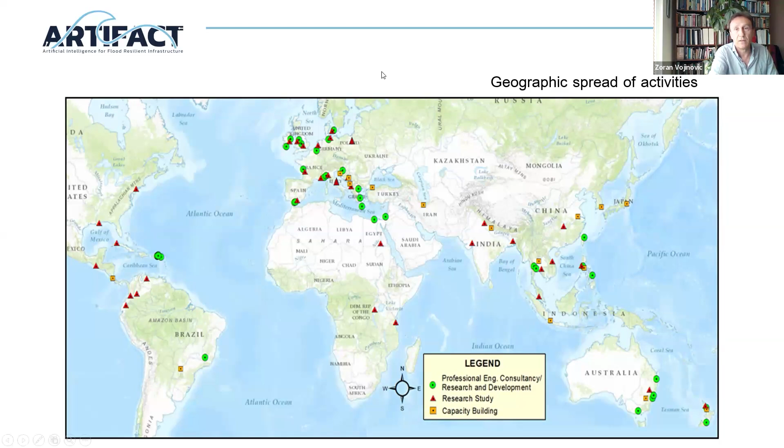I've pretty much worked around the globe, not so much in Africa, but in many other parts. In some of the case studies I'm going to show today, I will refer to some of these practical experiences that I've gained by working in different locations.

A couple of projects worth mentioning: notable research projects I've been working on and leading. There is a project called RECONECT, still active, we are in the phase of closing it now. It's on the topic of nature-based solutions, where we demonstrated in 9 different locations different kinds of nature-based solutions for flood protection. And before that, there was another very interesting project called Pearl, which also looked into ecosystem-based approaches in addition to modeling.

The learning objectives of this first lecture are to provide you with basic knowledge concerning urban flood simulation using physically based models, as Zoran mentioned. I'll try to cover some basic key concepts, and we will show you some practical applications. We hope that by the end of today you might be able to be more effective in applying new knowledge and supporting tools for flood risk management. So I will first start with some background information, setting the scene.

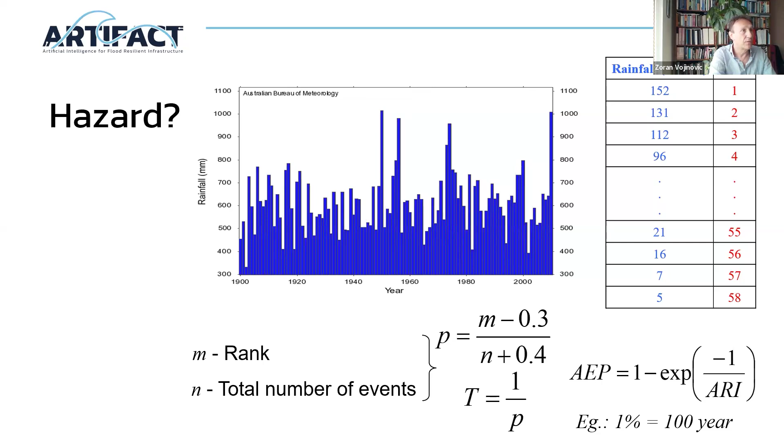Very briefly on the concept of vulnerability - there are more than 25 definitions that you can find in different literature, and again the disaster risk community has defined those. It can be referred to as the inability to avoid potential harm. So it is difficult to measure vulnerability, and often the overall dimension of vulnerability can be divided into different sub-dimensions.

For example, if you take an urban area, you can break it down into different aspects. You can look into the physical objects, the assets, the tangible aspects. You can look into the environmental or nature aspects, such as parks, maybe green areas, and so on. Then we can look into the social component, which matters because we need to know, in order to assess vulnerability in a particular area, who lives there, what is the age perhaps - is it a rest home, is it a school, is it an area which hosts a number of schools, and so on. So we need to look into the social aspects.

Economic - typically the dimension of vulnerability refers to the economic sector: how quick, how resilient, or how vulnerable is the economy of a particular urban area, and how quickly it can bounce back following a disaster. We can also come up with more dimensions, such as institutional - we can look at how different institutions, like emergency services or the health sector or other services, react in case of a disaster.

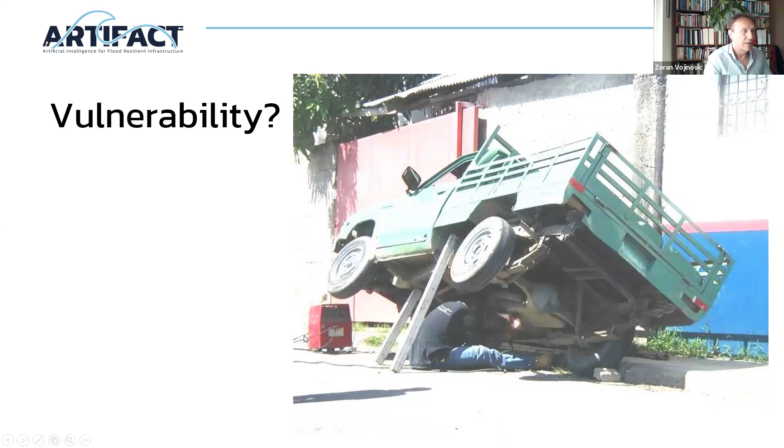This is what I like to show my students: if you have a guy working under a truck like this, obviously he's vulnerable. This is a very simplified illustration of vulnerability. Maybe here you can find some people who are more vulnerable, some who are less vulnerable. If people do things that put them in danger and they're not protected, they are vulnerable.

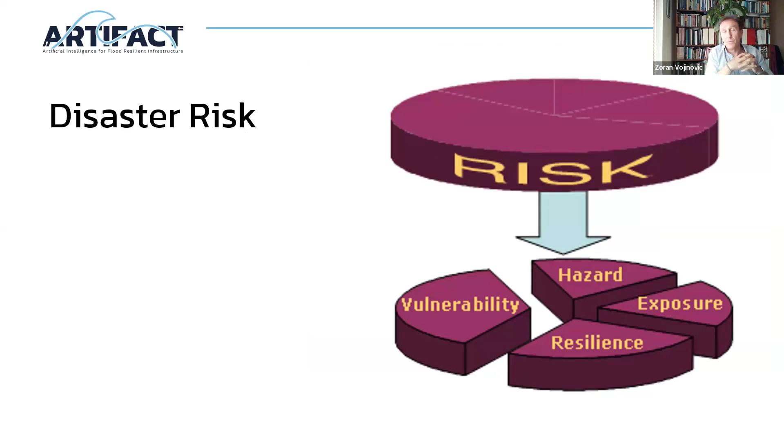So we can go on like this, but the bottom line is that risk can be decomposed into different components in order to assess it for a particular area, and to come up with flood protection measures which will minimize the risk.

We talked about this part. Now, an important distinction is how we estimate hazards, which is through the use of numerical models, and this is what we are going to talk about today. Vulnerabilities, coping capacities, and resilience are typically assessed through surveys, interviews, or other assessments, but not necessarily the use of models. Models, particularly computational models, are used for the assessment of hazards.

Before we move on with modeling, it's important to distinguish different types of floods, because different types have different physics and propagation properties, and you may need to consider certain aspects depending on whether you have pluvial, urban, or fluvial flooding. Flash floods are typically the fastest occurring, coming from steep slopes and hills. There can also be coastal floods, groundwater floods, or a combination of two or more types.

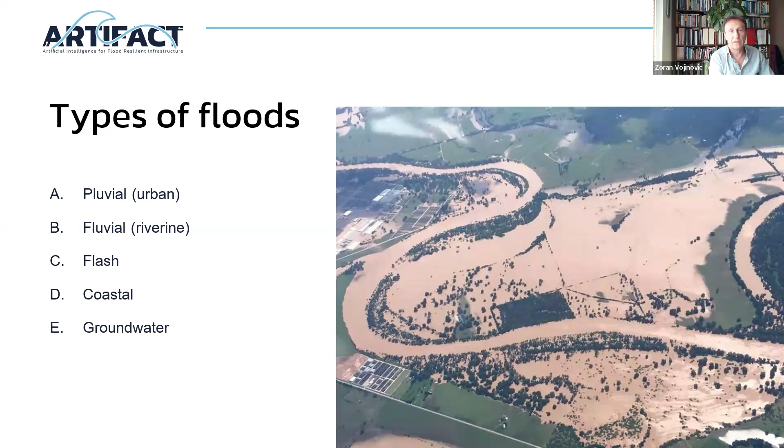If you have a picture like this, with a river and a large flooded area, the question is which type of flood this is. We're not in a lecture room, so I won't waste time asking for comments, but I'm pretty sure you can conclude this is a fluvial or riverine flood because it occurs along the banks of the river.

If we have steep slopes and hills which generate fast runoff that comes down into low-lying valley areas, that is typically referred to as flash floods. The difference between flash floods and fluvial floods is that the velocity, or the physics of the flood, can be considerably different. With flash floods the velocity can be 3, 4, 5, 6, 7 meters per second, whereas with riverine floods, the propagation and velocity is much slower.

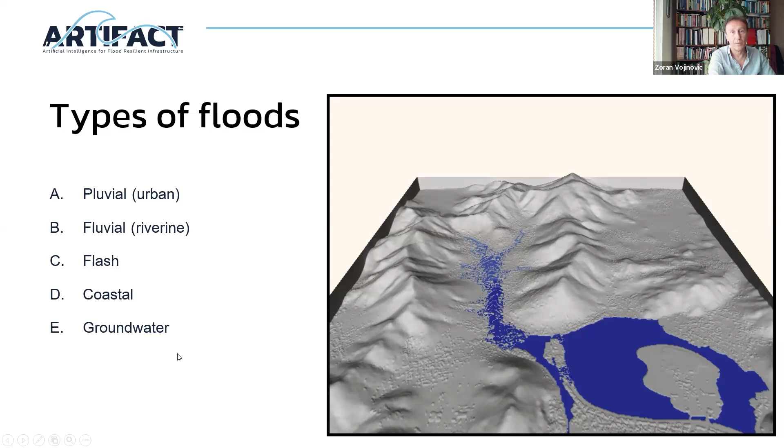So talking about flood hazards—again, models are used for flood hazards—typically we distinguish four variables that can characterize a flood hazard.

Models compute typically the water levels, velocities, and duration of a flood, and if you turn on the advection dispersion component, you can model the water quality processes and the concentration of pollutants and the sediment transport and things like that. So depending on the physics of the different flood type, you will choose different variables, which will be computed by your numerical model to express flood hazards.

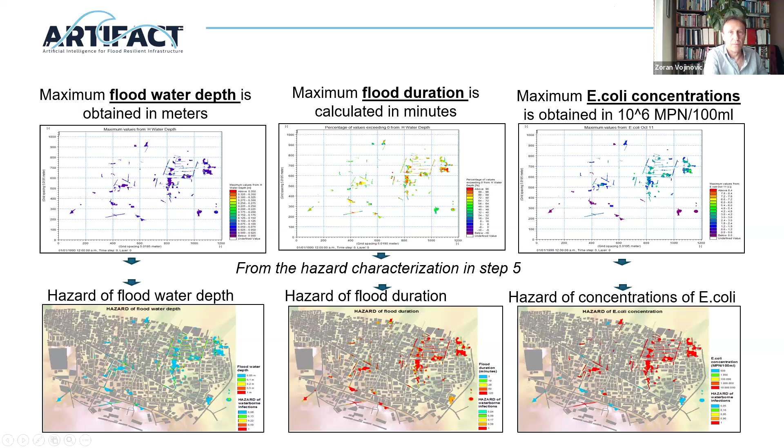So what happens at the end? You have whatever depths, velocities, durations, concentrations, flood hazard - you compile them all, overlay them, and then you get a map in GIS. So this is about the hazards, and this is why we need to use numerical models.

A very quick example of a case just to illustrate this concept - I'll move now from Thailand to the Caribbean. This is the island of Saint Martin, which is under the administration of France and the Netherlands. This is how the island looks on a nice day, and this is the administration border between France and the Netherlands, for the two territories.

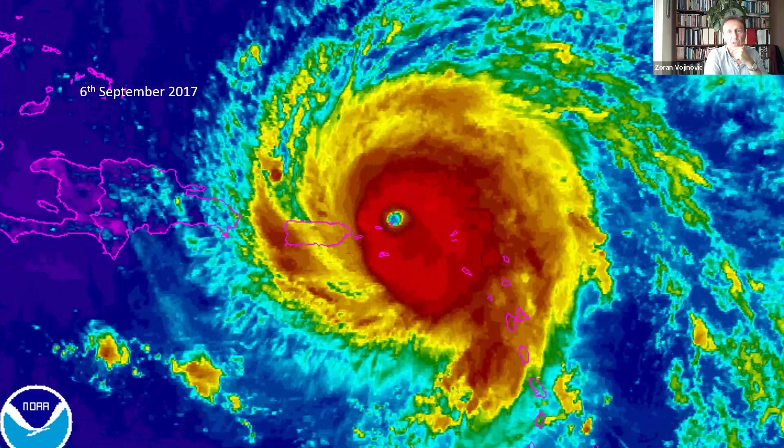This island suffers from tropical storms. In 2017, there was a big hurricane whose eye passed through and was assessed to be the biggest ever recorded - Hurricane Irma. The eye of the hurricane went through the island of Saint Martin and brought devastating damage, with wind speeds of around 300 kilometers an hour, but also a lot of heavy rainfall.

This is just an example to show how numerical models can be used for assessment of such events. We've modeled the actual pressure and wind fields and the storm surge, and this is how the hurricane propagated. We've also modeled the impacts on land, looking at how the resulting rainfall causes floods. In this case, we've used a combination of one-dimensional and two-dimensional models, which I'll explain in a bit.

As an interesting sidetrack, we've also used similar two-dimensional models to compute tsunami effects for the same island, because there are tectonic plates just north of Saint Martin known to cause earthquakes and tremors. You can also use numerical models to assess the effects of tsunamis.

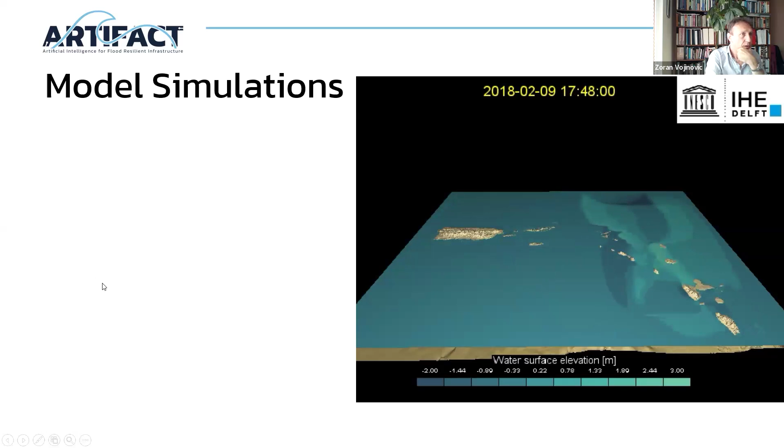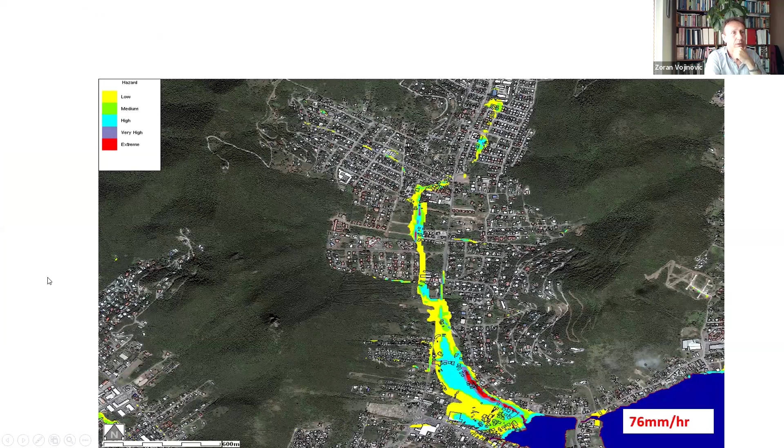If you combine the two using those ranges, you can present hazards for different events - for example, a 1-in-2-year, 5-year, 10-year, 20-year, 50-year, or 100-year event, and then extreme events. You can overlay that information with vulnerability data - we did on-the-ground assessments of critical buildings - and come up with a flood risk map.

So this is the introduction, just to set the scene and explain the importance of numerical modeling for flood risk assessment, because it really drives the estimation of hazards.

When we talk about urban drainage simulation, we're really talking about modeling minor and major systems. The minor system is the pipe network below the ground; the major system consists of the overland flow paths. You may have interaction between the minor and major system, or primary and secondary - in Australia they call it minor/major, in the UK maybe primary/secondary, and in the literature some refer to the same dimensions as below ground and above ground.

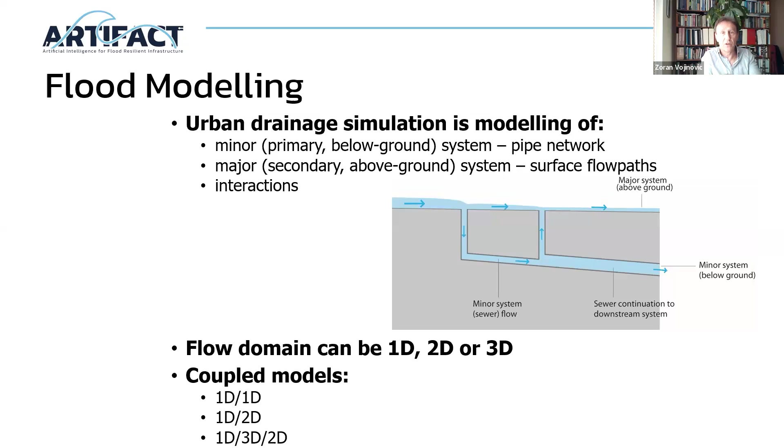The interaction may happen through manholes, connecting points, or gully pots. The flow domain can be one-dimensional, two-dimensional, or three-dimensional. Depending on what we're studying, we can couple these models: typically a 1D model for the minor system pipe network, and 1D again for overland flow paths - that's the 1D-1D coupled approach. Alternatively, you may couple 1D with a 2D model for modeling overland flows along surfaces. If you need to look into vertical distribution, such as how flows go into weirs or particular structures, you may introduce a three-dimensional model.

The types of models that can be used - we distinguish between stochastic and deterministic. Stochastic models obviously have some random character or random features, and in hydrology there's a lot of randomness.

In the literature, you'll see people talk about hydrologic or hydraulic models. Sometimes you may see a distinguished representation through lumped or distributed models. In terms of the type of model, what we also at some point called data-driven models is perhaps what has been referred to as artificial intelligence, but we may also have rule-based models, like using fuzzy models, where we set up the rules. We can also have physically based models, and a combination of these different models, which we refer to as hybrid.

The models can also be conceptual or process-based, can be simplified in terms of the dynamic equation or momentum equation, where I will come back in a moment into different components of that equation. So we can simplify it using the kinematic wave, or we can use the full dynamic wave.

The models also, you can find in the literature, people talk about low resolution as opposed to high resolution. Low resolution means that the computational points are few compared to high resolution, where you have numerous, many more computational points. We can also have a model which replicates flows through a sewer system, surface flow, or coupled models.

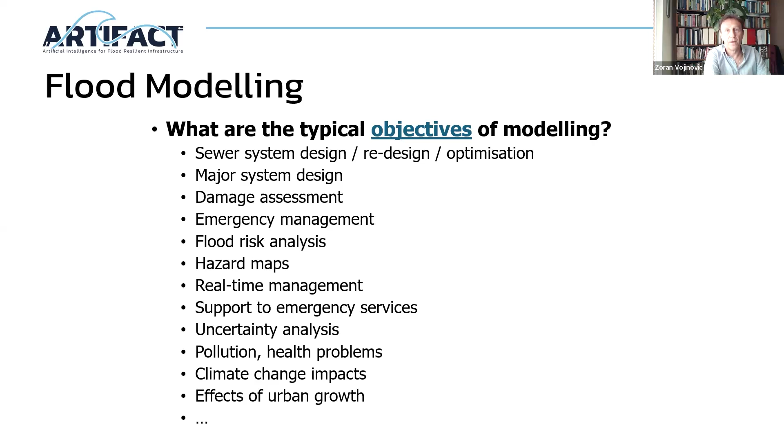So why do we bother with modeling? The models are typically used if you want to design a new system, redesign it, or optimize rehabilitation measures. If you want to assess damages for emergency management, flood risk analysis, models are fundamental for assessment of hazards, real-time management, real-time control management (RTC), support to emergency services, uncertainty, pollution, climate change impacts, effects of urban growth, and so on. For all of these questions, we would need support from numerical models.

So what data is needed to set up a model? Of course, you need rainfall data. For two-dimensional models, we need digital terrain models, or contour lines, or digital elevation or digital surface models. We need information about land use. We need information about the drainage system, which we normally use to set up the one-dimensional model. This can be either detailed, containing every single pipe, but that's very rarely done. Usually, every model of a pipe network system is simplified to a certain degree, so we omit certain pipes and manholes and focus only on the main trunk sewer lines.

We also need observed flood events. Why do we need observed flood events? We need them in order to calibrate the models. Why is calibration needed? It's in order to adjust model parameters so that the model can be brought to predict results that are closer to reality rather than just some arbitrary results.

We may also need some socioeconomic data for damages, insurances, traffic, and so on. The mode of simulation with the models can be either online—you're running the model right now, maybe receiving information from numerical weather prediction models about upcoming storms, and then simulating to predict water levels in your system, which you may use to open sluices or gates to regulate the system, or engage emergency services for evacuation. Or you may have offline simulation, which is not real-time, but running simulations for scenario analysis for the future.

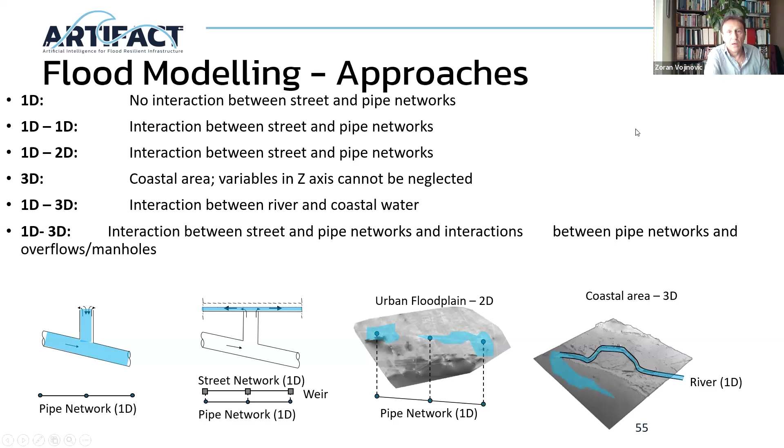So the take-home message is that there is no perfectly accurate model. Modeling work is never accurate - and I put that in apostrophes. That's because models are really a representation or approximation of reality, and it all depends on the assumptions, the complexity and resolution of the model, whether the results will have reduced uncertainty or large uncertainty.

In terms of calibration, it's a very important process because that drives the adjustment of model parameters. If the model parameters are not adjusted and default values are used, it may be appropriate for some areas but maybe not for others.

Most of the time it is not appropriate, and then you may get either over prediction or under prediction. So if you're using your model for design purposes and it's over predicting, you will over design your layout, which may lead to unnecessary expenditures. So to minimize these issues, you need to pay careful attention to calibration.

Calibration is a process which requires real world measurements, which I'll be talking about in the second hour. Those measurements are used to compare with the model results, and then through a trial and error process we adjust certain parameters. There are parameters on the hydrological side of the model and also on the hydraulic side that we need to adjust. Then we try to merge the two curves together, the modeled and the observed or measured.

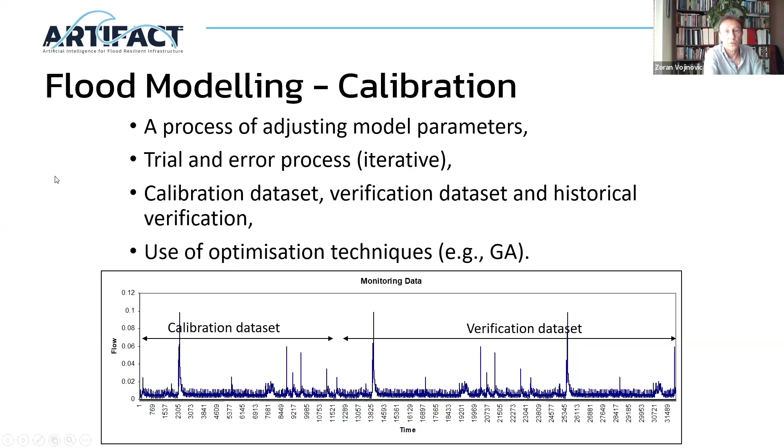So now the question is, how do you know when to stop, when these differences are acceptable or not? What we need to do is use some statistical error functions.

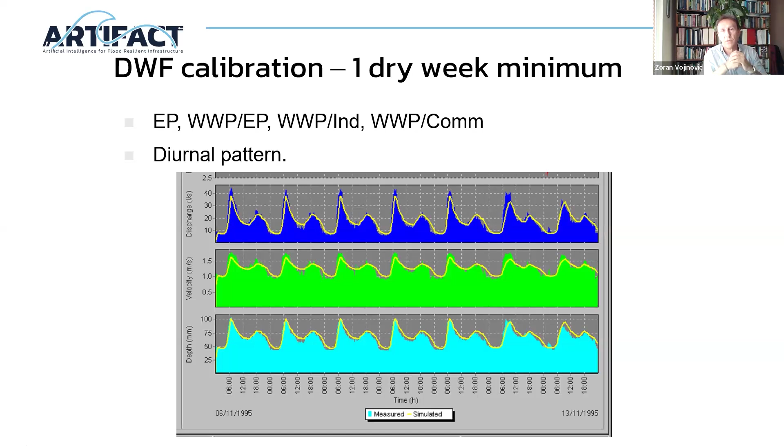I mentioned before that in Thailand you have a combined system where one pipe carries two flow components, the wastewater and the stormwater. The sequence of attempting calibration goes first through the dry weather flow calibration, which is related to flows coming from wastewater points, sewage and so on. Then we would attempt the wet weather flow calibration, which refers to the particular response of the system to a rainfall event. So first we do dry weather, then wet weather, for a combined system.

And then we need to be very careful when we look into the errors, when we study the error of our model as we calibrate it - we may track the temporal, seasonal biases or magnitude biases.

Temporal and seasonal biases are the biases that occur throughout a particular period of time or particular season. Maybe a model is constantly over-predicting or under-predicting during the wet season where the groundwater aquifer comes in, and maybe we are not incorporating the hydrological model of the below ground surface to a great level of detail. So we need to be careful to track for this type of bias.

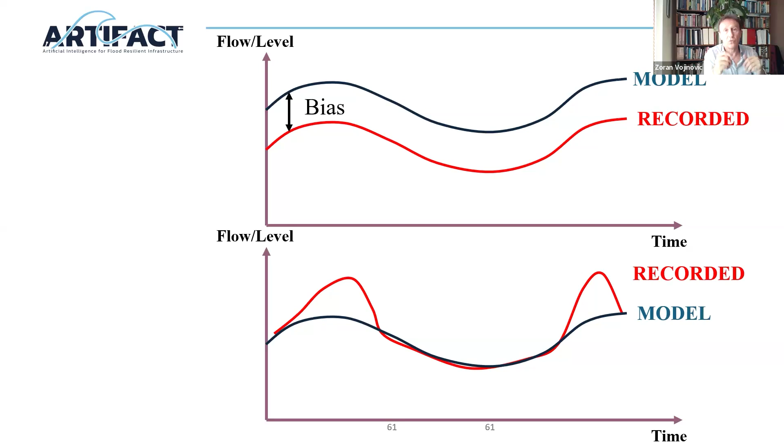Sometimes the bias can be a magnitude bias related to either low flows or high flows. Maybe your model will be predicting very well on small events, but not very well on large events, for which you need to perform some additional rounds of calibration. You may also plot residual plots between your errors to detect these biases.

You can use different statistical formulas to look into the error of your model, or the accuracy of the model, and there are different functions you can use. I happened to be studying that as part of my PhD some time ago, where I looked into different distributions of noise and different range magnitudes. There can be different functions used: root mean square error, coefficient of determination, coefficient of efficiency, Pearson's coefficient, and so on. I found one particular function which was least dependent on, or least influenced by, different conditions, but you can use standard statistical formulas.

In terms of the calibration procedure, on the hydrological side of the model, we would first adjust the mass balance, looking into things such as the runoff coefficient and the percentage of impervious versus percentage of pervious area. Then we would go through the adjustment of the timing of the peaks. So that's for the hydrological part.

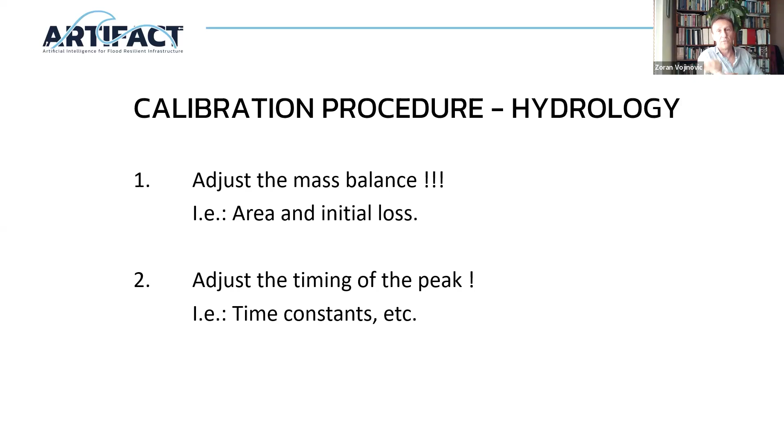With hydrodynamic models, we have two components: one is the hydrology, which is the rainfall runoff, and the other is the flow through either pipes, open channels, or overland surfaces. For the pipe flow models, which is very much the hydraulics, we can have different approximations, and in hydrodynamic software we typically use the shallow water equations, which are the Saint-Venant equations.

What you see here is the one-dimensional expression of the Saint-Venant equations, where the top equation is the conservation of mass, or continuity equation, and the second equation is the momentum, or dynamic, equation.

That equation has a number of different terms, which, when you run some of this software, particularly commercial software, they'll give you an option on. The first term on the left side is the local acceleration term, then you have the convective acceleration, then the pressure term, then the friction and slope effects. Depending on the approximation you want to use, you can eliminate certain terms, and you can run your model as a kinematic wave, diffusive wave, or dynamic wave.

A key take-home message is that if you are dealing with floods, you should be better off working with the dynamic wave and not the kinematic wave. Although the kinematic wave is computationally much faster, it really comes down to the Manning's equation, which is not influenced by dynamic conditions such as backwater effects and flood issues.

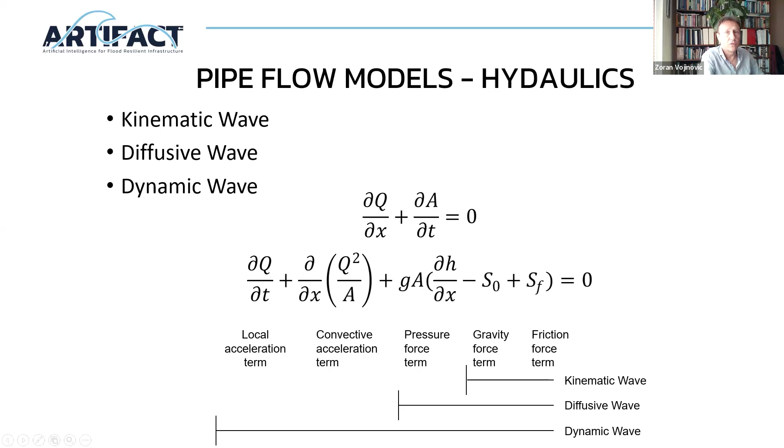Another good reference, besides the two books I mentioned that address all these things, is an article published some time ago in Urban Water Journal, which goes through all these assumptions of the different equations and also talks about how these equations are solved. You can also find this in the two books, or any other book, that talks about hydrodynamic models.

These equations are basically hyperbolic partial differential equations, and they cannot be solved analytically. For them, you need to discretize the domain in terms of time and space. Then through the discretization, you can use different solving methods, such as finite elements, finite difference, and so on, and these equations are solved numerically through iterative processes.

So for the pipe flow, the calibration procedure involves looking into the Manning's number at nodes in terms of head losses, and also in terms of the weirs.

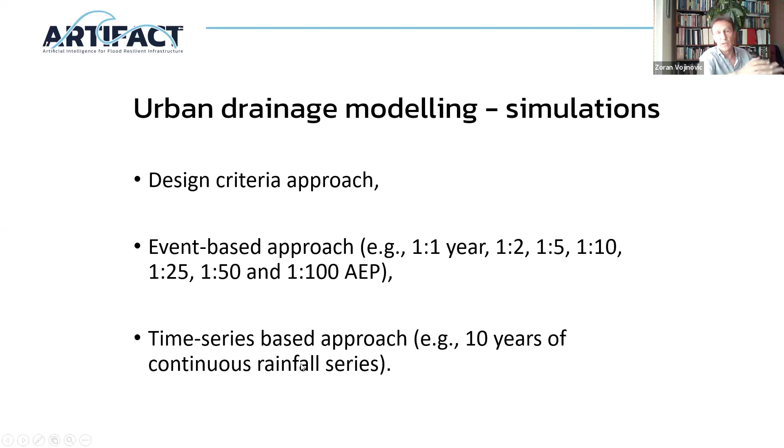Simulations can be either a design criteria approach, event-based simulations, or time series, where you take the whole series of rainfall data and simulate.

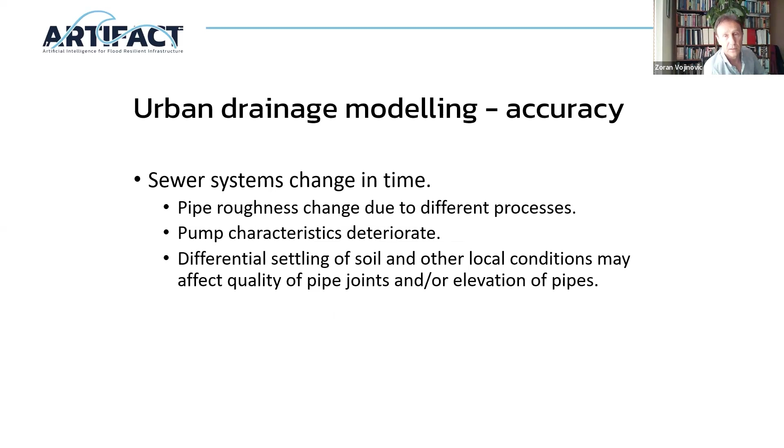Also important: sewer systems change over time, and pipe roughness changes. If you have a pipe constructed 50 years ago with a certain material and certain roughness value, you'll probably need to run a CCTV camera or something like that to look at the condition of the pipe and try to express that in terms of roughness.

I will skip this part. In terms of software, there's commercial software, typically DHI software, where the numerical engines were written by Professor Mike Abbott, the late professor at IHE Delft. I had the great privilege of working with him and co-publishing one book with him. All these DHI engines are powered by Mike Abbott's numerical developments.

On the other hand, we also have software from Deltares, another big lab for hydraulic modeling software. You can also find others like Bentley nowadays, a different company, and software through the US EPA, or HEC-RAS software for one-dimensional modeling of rivers, and so on.

I think I will need another 5-10 minutes into the next block of lectures just to finish off the modeling steps.

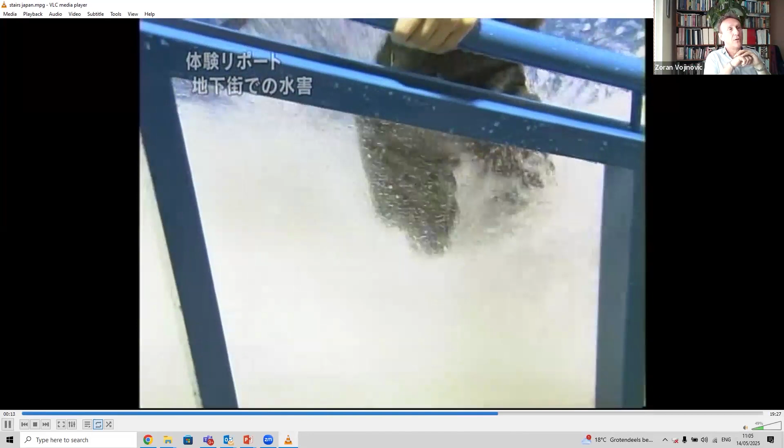I'll show an example of how our Japanese colleagues look into this. I hope you can see what I'm showing here. This is a test carried out quite often in Japan. When you talk about hazards, different velocities of water, different depths, and different circumstances will affect people's ability to walk through flooded areas.

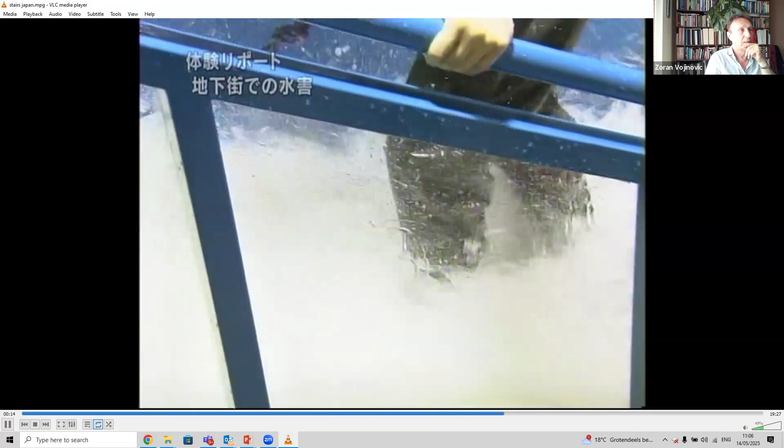This is an example from Japan, where in urban areas, particularly vulnerable spots used to be - not any longer, but used to be - the metro stations, where water would gush down through the stairs, and people who are trapped need to walk out. This gentleman is showing that it's not really easy to walk through that.

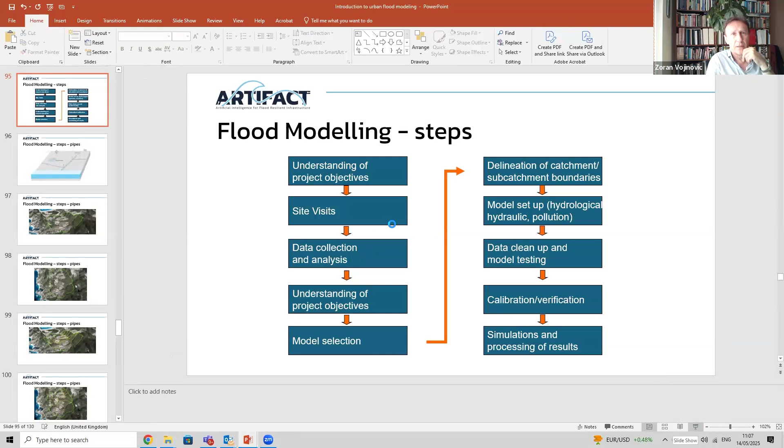Okay, now I will move to the part of flood modeling and what the steps are, how do we go about it. I have lectures for both open channel flow and pipes, but I'll just pick the pipe example. So what are the steps? Okay, we can see now - yeah, now it's fine. Go ahead, I think it takes a couple of seconds to come up.

So what are the typical steps if you are about to conduct a flood modeling study for a particular area? Obviously, you start by getting a thorough understanding of the project objectives, and sometimes the project objectives may influence selection of your model, your data resolution, or your data collection campaign and everything else. I think it's very important to be clear, particularly if you are working as a consultant for your clients, to understand what is driving the flood modeling study.

Then, of course, when you want to build a model - which is a numerical approximation of the real world - it is very important to perform site visits, to look into different parts of the catchment, look into different structures if there are any, maybe look into pumping stations, overflow structures, and so on. That helps a lot when you want to reproduce that in a digital world in the model.

Then, on the basis of the objectives and available data, you would plan maybe additional data collection. And when you perform that, you will analyze your data, because sometimes you may have further gaps or inconsistencies you need to clean up. That's why I like to put the question again - understanding of project objectives - and maybe on the basis of the data you have and the situation you inspected, you may need to refine your project objectives.

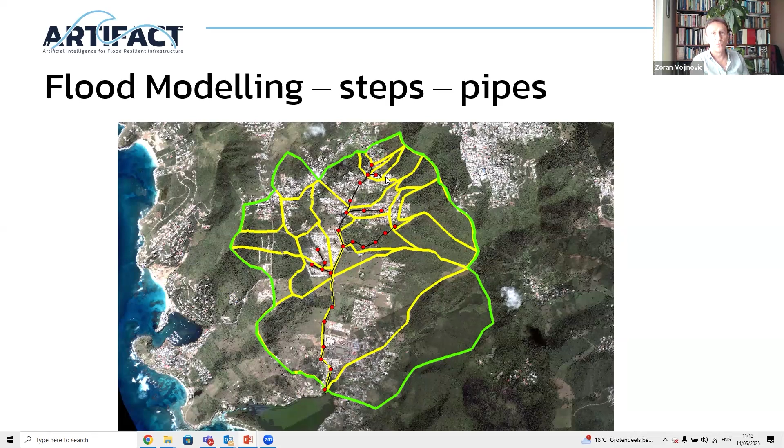So the next point is to give identification to each and every sub-catchment, and also each and every manhole or node in the system. Then for each and every sub-catchment, we have to calculate the various hydrological parameters depending on the hydrological model we are using.

Typical parameters are the percentage of imperviousness, slope, and type of soil, which will also drive processes such as infiltration and so on. Depending on the different hydrological model, you will collect different data for each and every catchment.

And then you will need to define the loading points. The loading point is the point in the network, or the node in the network, which will receive the flow coming from these sub-catchments.

When I mentioned the governing equations for the hydrodynamic models, which are the shallow water Saint Venant equations, we looked into the form of one-dimensional equations, with one continuity and one momentum equation. Obviously, if you have a 2-dimensional model, it will be 2 momentum equations and 1 continuity. These equations are hyperbolic partial differential equations, and they require boundary conditions.

In order to be solved, they are designed for subcritical flow conditions, not supercritical flow conditions. Sometimes conditions in the pipe flow system will change from supercritical, gushing down along a steep slope, and then going to a flat valley, where you have subcritical flow conditions.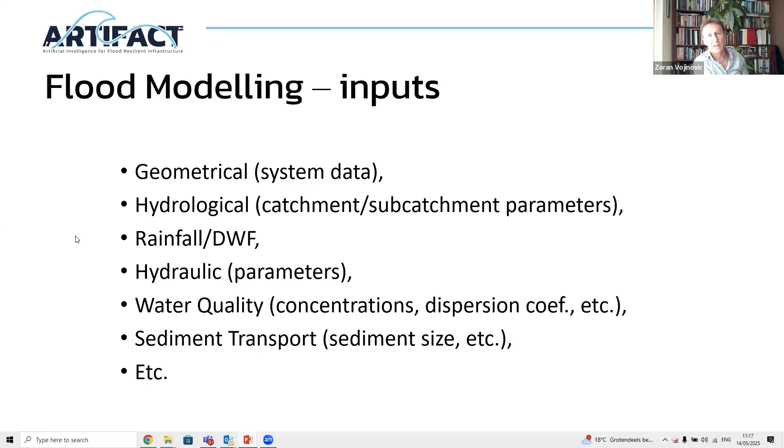In terms of the modeling inputs for a pipe network system, we need geometrical data, system data, manhole and pipe data. We need hydrological data, rainfall, hydraulic data. If we want to go into advection, dispersion, and water quality processes, we may need concentrations, advection and dispersion coefficients. If we are looking into sediment transport, we need to look into what type of cohesive sediments we have, what size, and so on.

When we set up this data, typical pipe flow data is comprised of the nodes or manholes and the pipes. For the nodes, the typical information we need is the X and Y coordinates, and the invert and ground levels - invert being the bottom, ground level being the top.

We need the diameter and standard diameter of the manholes for pipes less than 1 meter diameter. For larger pipes, maybe 1.5, 2 meters, you will need a chamber with special dimensions which also need to be taken into account when setting up a model. But for smaller, regular pipes, which are most common, you just put the information of 1 meter diameter for the manhole. And of course for the pipes, we need the diameter.

If we are setting up a two-dimensional model, we will need the airborne laser survey or contours to be interpolated in a GIS to create a raster representation of the surface topography. You may have a one-dimensional model for the pipe network and a two-dimensional model for surface flow, where we couple these two models, and there is an exchange in momentum, information, and water levels between the two model domains.

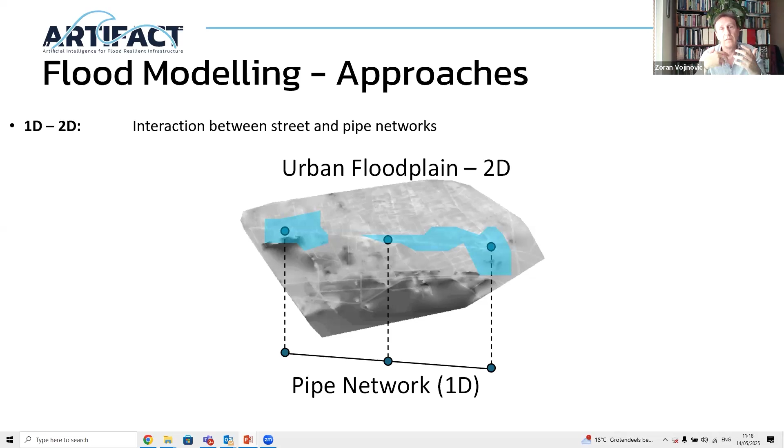The 1D model, when it gets surcharged, passes that information to the two-dimensional model, which computes through the cells how the water propagates, and then the water can also come back to the pipe network. So that dynamic interaction can occur, and it can be computed.

In terms of the two-dimensional model, a couple of words we should be aware of: the digital terrain model, digital surface model, or digital elevation model. We can have a representation of bare earth - no objects, no buildings, no roads, nothing - just the bare earth interpolation, which is on the left side, or you may embed the road network.

In some places around the world, people use the road network as a dual drainage system, where the curbs are quite high and used to convey water as an additional system. In that case, you may need to incorporate roads because the streets may act as open channels into your DTM - this is the representation in the middle. Or you go further and incorporate the heights of the buildings themselves, which is what we have on the right.

The flow directions on the left side, if it's a smooth bare earth DTM, the water can go anywhere depending on elevation, from the higher cell to the lower elevation cell. In the middle, where you have roads, the water will be confined to the roads until the curbs are overflowed.

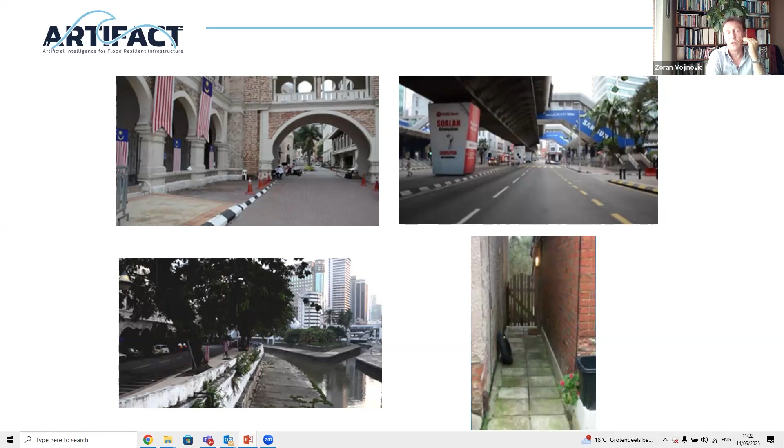And again, your flood map can be different. So what I'm trying to say here is not only that the model can bring in inaccuracies or uncertainties, but also the data drives that a lot. And the buildings can be represented in different ways. You can elevate the buildings, or you can induce roughness values.

I'm not going to go through this, or sometimes there are methods based on the energy loss footprint, or you can model buildings as porous elements. One of my colleagues, Vincent Guinot, a former colleague from IHE who now lives and works in France, has done a lot of research in terms of modeling buildings as porous elements.

And there are other methods. So I will conclude now with a couple more slides just to show you that we have to be very careful when we perform airborne laser survey. I had a PhD student who looked into all these commercial filtering algorithms, and obviously the person who does the flyovers and collects the airborne laser survey point cloud data will need to process this data through a particular filter.

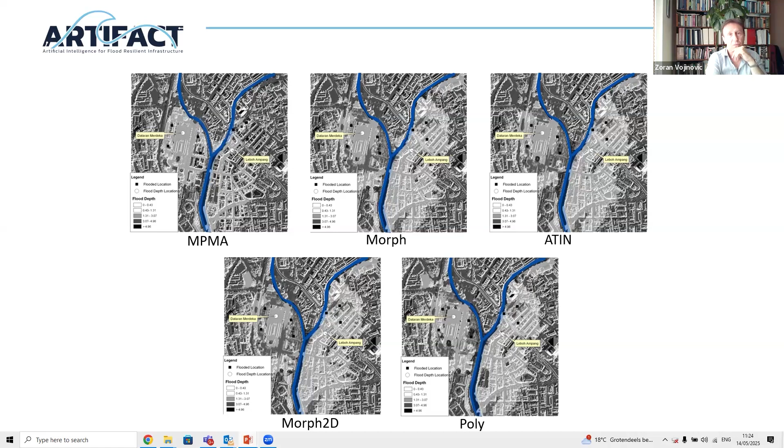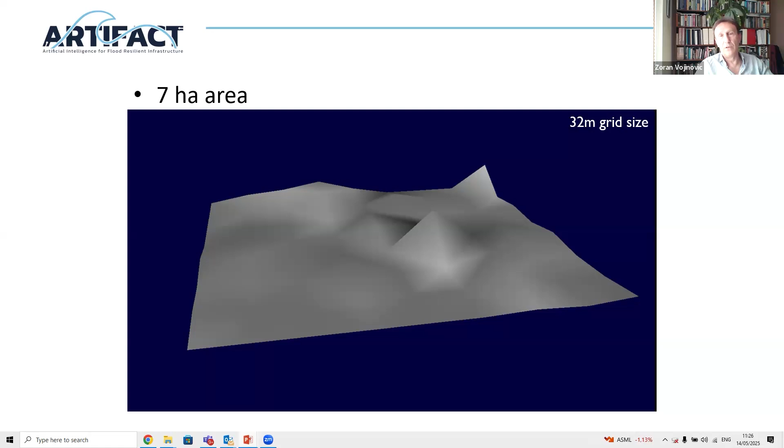It's something to be very careful about when you get your flood model results. At 64 meters and 128 meters, no feature is evident. So if you have 5, 10, or 15-meter resolution, depending on the topography, the 5-meter resolution may give you a reduced flood extent compared to 10 or 15 meters. And if you're using a 15-meter resolution model, and your critical infrastructure is shown to be flooded, in actual fact, if you use a high-resolution model, which we assume is more physically accurate, you may find that the critical infrastructure isn't flooded at all. So it's something to be aware of.

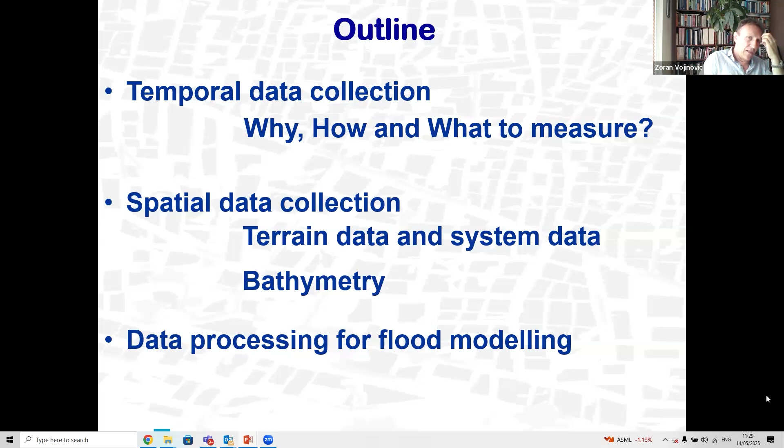This is what we're going to be covering now: data processing for flood modeling. Again, same references, I don't need this big introduction here. I will jump immediately into the instruments.

How do we measure flows? We can use different techniques and instruments: sensors and meters, structures constructed in pipes, and also some portable devices. What is usually measured is the depth or water level, velocity, and then the quantity is computed. Nowadays these types of surveys are getting quite affordable.

By the way, I have a cat here, so if you hear occasionally a little meow, that's my cat.

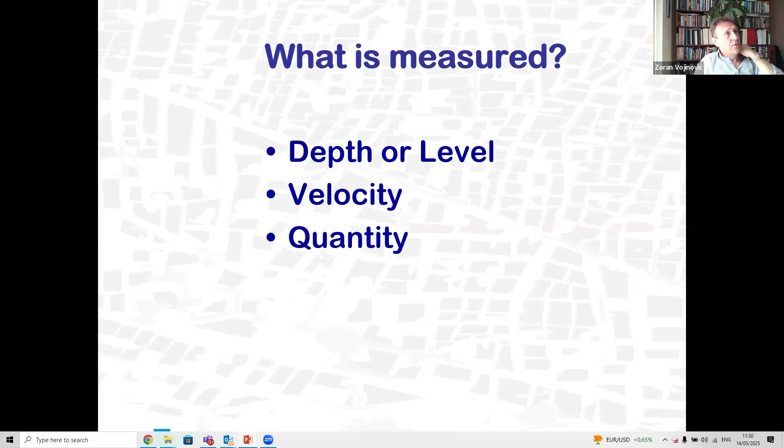The contractor who performs these kinds of surveys would process the depth and level data, velocity data, look into some noises, and try to express that into the form of a quantity, or Q, discharge. Sometimes we can opt to use a very simple technique, just using a ruler to measure depth. Sometimes you may opt to use pressure sensors, and sometimes an ultrasonic sensor. I'll go through the very basic aspects of this.

The ruler, or depth of flow stick meter, is really of limited use, because you cannot stand there with a ruler for hours recording depths. Obviously you can do a single reading, but it may not be accurate because you may have debris at the bottom of the domain you're measuring, which means you need to clean it properly to get more accurate readings.

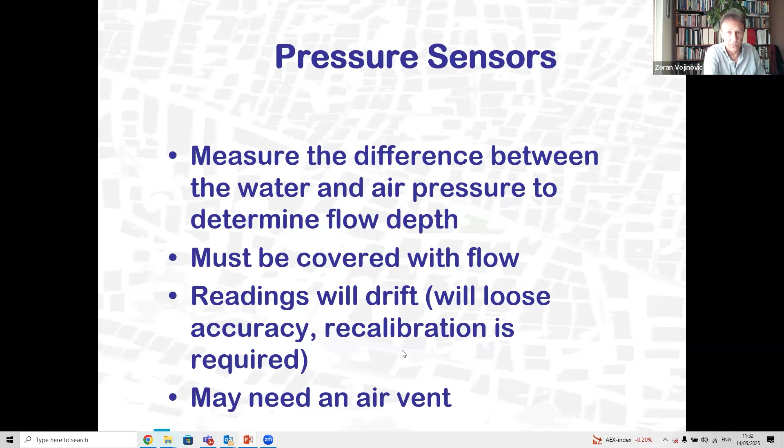Pressure sensors measure the difference between water and air pressure to determine flow depth, and they're very sensitive to the flow that covers the actual sensor. So they have more reliable readings when there's greater depth than when there's very low depth, going even below the sensor itself. Readings may drift and require recalibration. Pressure sensors are also sensitive to gas conditions in the system, because in sewer systems we often have gas of different composition, and we may need to perform some air ventilation of the system. This is an example of a pressure sensor for a flow meter.

Obviously all these instruments have advantages and disadvantages. As I mentioned, too low flow is hard to measure, and sometimes you may have a loss of power. The ultrasonic sensor, typically installed for pipe network systems, can be at the bottom or at the top of the pipes, at the soffit point. It measures depth, and if it's at the top, it measures the airspace above the flow.

It uses sound and a reflector. It has a transmitter which sends the sound signal, and a receiver which gets the signal back. It measures the time of return and recomputes that in terms of depth. Human hearing is between 20 hertz and 20 kilohertz, whereas the ultrasonic signal is 40 kilohertz, so it is beyond the range of human hearing.

I'm not sure if my cat will be able to hear it or not, but this is what happens for humans. Ultrasonic sensors can often be affected by noise, because it relates to sound. So if you have big construction works on the road, you need to be careful with your readings, installation, and signal direction, and this is how it gets installed.

If you have a pipe, you have your metal ring, you position your sensors, either pressure sensor or ultrasonic velocity sensors, and then there is a logger further up connected via cable. The logger can sit in your manhole, or you can take it out of the manhole to another chamber which is protected from vandalism, but usually it sits in the manhole.

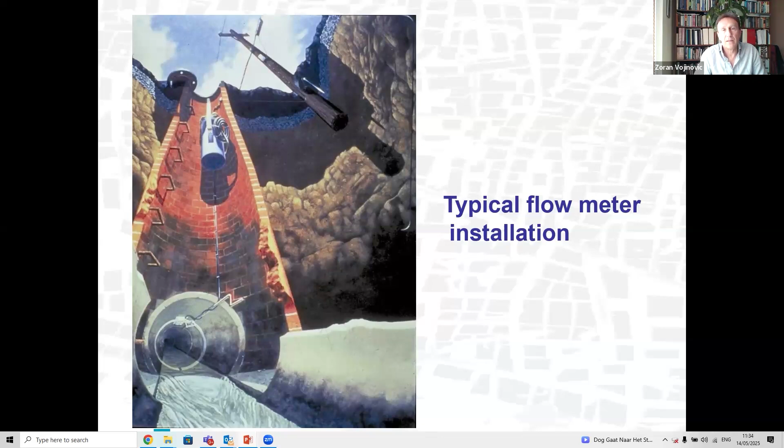And then the data from there can be transported. You can either go physically to the site and connect with your computer, or you can get it wirelessly transported through your telemetry and SCADA system to your office. So this is how it works. I mentioned that it has a transmitter and it detects the echo.

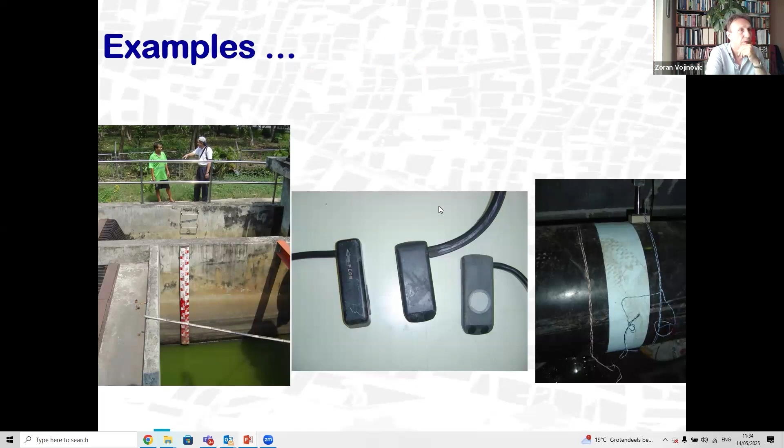On the left side here you see a picture of the ruler depth stick flow meter. This is an example, I took a photo of this in Bangkok, in one of the pumping stations there. The guy who operates the pumping station would record particularly the water levels at a certain period of time. These other things are different velocity and pressure sensors.

What you do is mount them on this kind of metal ring. You position them there, then depending on the diameter of your pipe, you insert it into the pipe, and there is a cable. Then, as I said, you can either come and physically download this, or you can receive it through the wireless system. There are different problems with ultrasonic sensors.

I'm not going to go into these details. All of these instruments have different advantages and disadvantages. You can also use electromagnetic meters and so on. This is the velocity sensor.

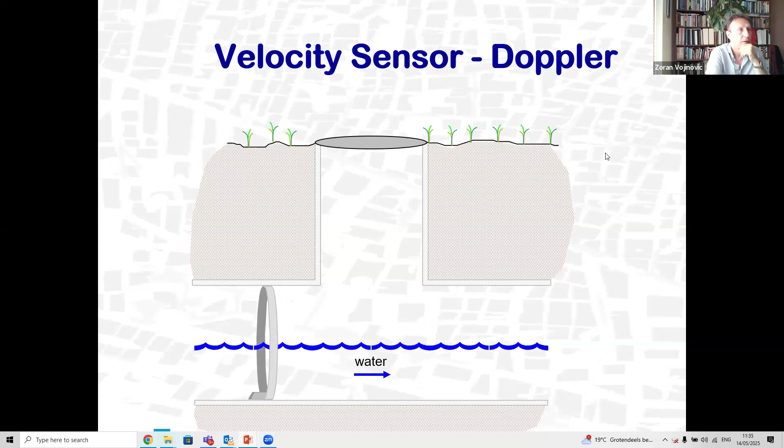If you have a flow cross-sectional view of a pipe network system with a manhole, then you have two crystals: one is transmitting the ultrasonic signal, and the other one is receiving it back.

So why is this important? It's very important to carry out these surveys, this kind of measurement, so that you can get the data in terms of the flows. But at the same time, we would like to always install a rain gauge in the vicinity of our flow gauge, so that the rain gauge can get the corresponding rainfall data.

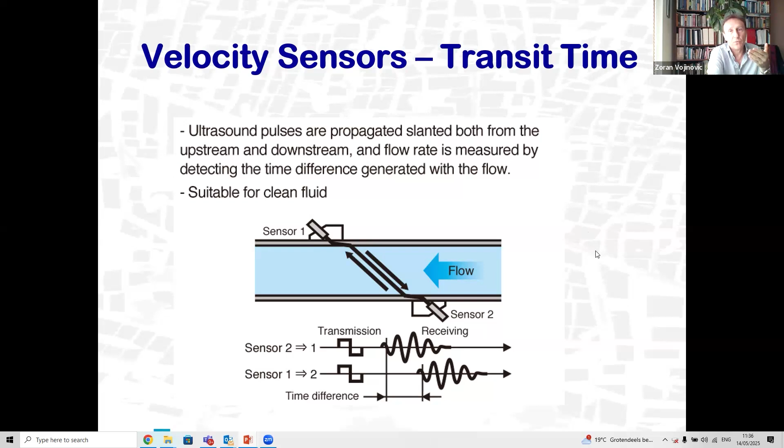Once you record this, you can open it up in Excel or whatever data processor you have, and look at how the rainfall looks in relation to the flow records. That can already help you a lot, but a further step is to use that for calibration purposes. I will move on because I have another 7-8 minutes to go.

Okay, this is very important: how to pick a location where you want to install your instruments. Different locations will make your instrument either more erroneous or more accurate. If you're picking a location close to a particular bend where the pipe turns, let's say 90 degrees, due to head losses, and if your gauge or sensor is installed very much in the vicinity of that bend, it may be affected by velocities shooting in all different directions. So you need to be aware of it.

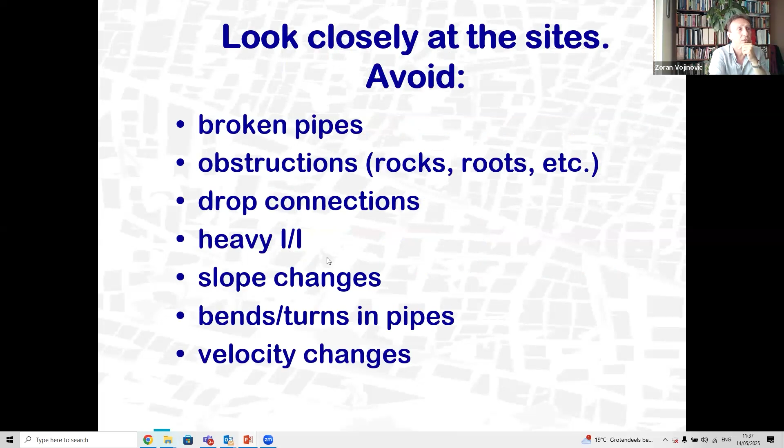Also, if your installation is where you have a steep slope leading to the transition between supercritical and subcritical flows, then again, due to head losses at that transition, you may get problems. And obviously you will try to avoid locations with structural integrity issues in pipes, like cracks. So broken pipes, obstructions, drop connections, heavy inflow infiltration, slope changes, bend turns, and velocity changes are all things to watch for.

Another important thing to mention here is that if you ever get to do this type of survey, you really need to be very careful how you approach confined space entry. There are always procedures for that because going into confined spaces such as sewer systems, you have hydrogen sulfide and other gases, sometimes methane, even explosive gas. So you need to test the situation, the concentration of gases in the system, and then ventilate if necessary, and wear appropriate wardrobe and equipment in order to do that.

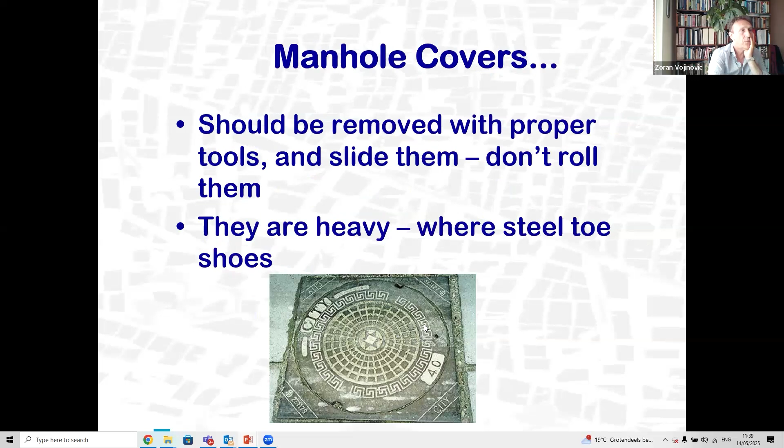I've known people when I worked and lived in New Zealand who were very experienced to manage this, very confident. They were entering the sewer systems on a daily basis for so many years. However, it is just the moment when the gas can overcome you, and then you can have a problem. I knew this chap, Ken Carew from New Zealand, who was a very capable guy, but he was not careful once, and that cost him his life. So obviously you may need some vaccinations, and you must be careful when you lift manhole covers because of the weight that they carry.

Now I will move into another thing. When you measure the rainfall, we typically use tipping bucket rain gauges, which is the bucket that when it gets filled, it tips and sends the signal. So you know how many tips there are, and you can relate that to the depth that fell.

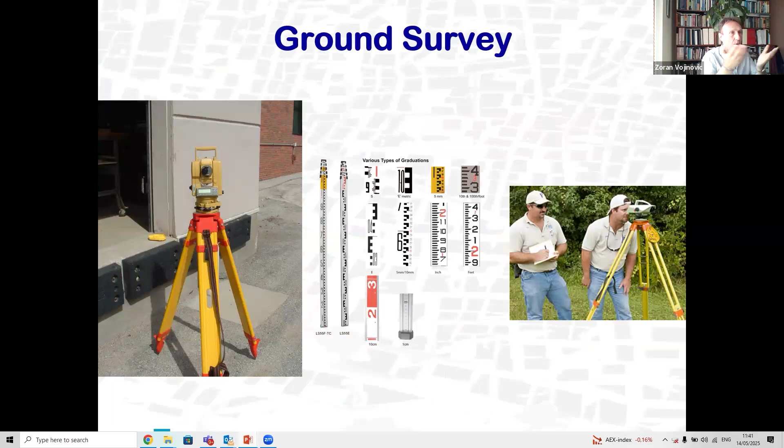Now, a few words on spatial data collection. Two-dimensional models require terrain data collection, which you can do either through ground surveys using a level meter, theodolite, or total station to measure this. Then you take the spot elevations and interpolate to create a continuous surface that you can later import into your two-dimensional model.

But nowadays, the technique called airborne laser survey is getting very convenient and affordable, which basically requires a low-flying aircraft with a GPS system that talks to satellites at the ground positioning station, an inertial measurement unit, and also a LiDAR scanner - light detection and ranging laser scanner - which sends a signal to the ground and measures the time lapse when it comes back. Different surfaces will have different reflectance properties. The operator flying around will pick up all elevations, including morphological objects, greenery, buildings, and everything that is passed through.

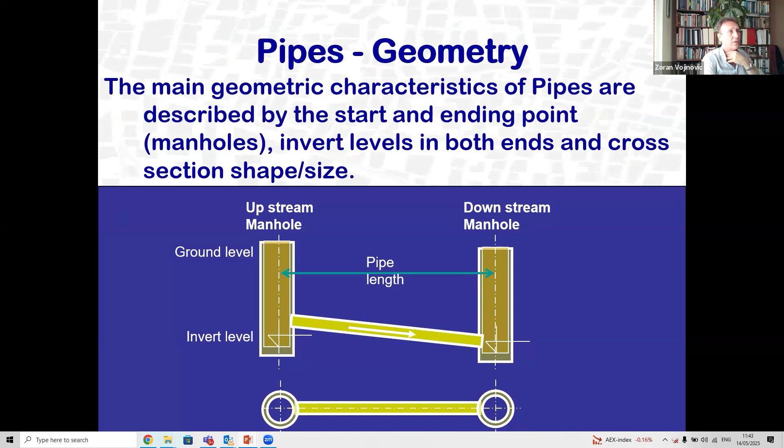You may also need to be aware that the pipes you model can have different cross-sectional shapes. It can be circular, O-shaped, egg-shaped, or any other shape, depending on the system. If it's an old brick sewer, it usually has an egg-shaped profile. Most PVC pipes nowadays have a circular shape, but it all depends on the conditions.

We talked about this information in a previous class, what we need.

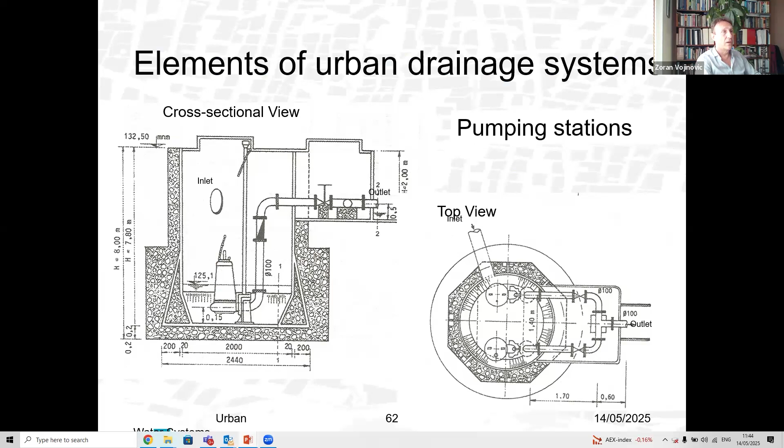You also need to collect data about your pumping stations. You need to know if the pump is submersible, if there's a wet well, and the characteristics of this wet well. Pumping stations are defined through the QH relationship, and that's what you enter into the model.

Another important aspect of drainage systems is the amount of water that gets into your pipe system, which depends on the number of gullies and how they're distributed along the roads, or the catch pits, cesspits, or catch basins, whatever people call them. You need to be aware of those.

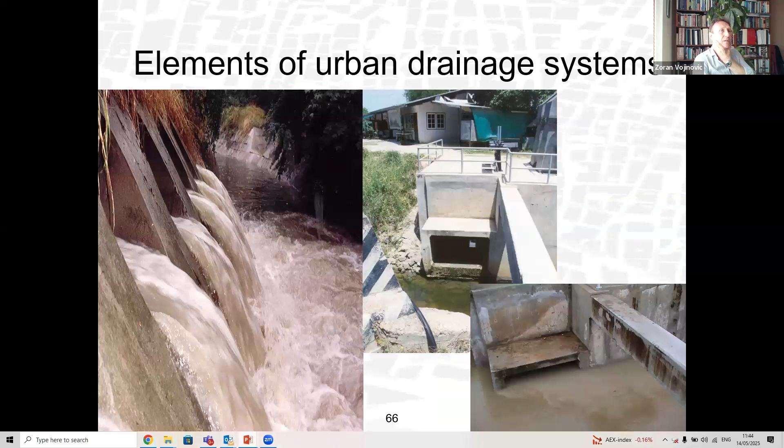Combined sewer overflows, separate sewer overflows, are very important structures. We need to pay particular attention to how to measure them.

Sometimes you may have a combination of open channels and closed conduits. The previous discussion was about pipes, now about open channels - you need to get the cross-sectional areas. You may also have culverts and bridges, which can be very important depending on where they are, because they can act as a restriction to the flows.

In case you have retention or detention systems, you need to know the area and the depths, and these things can be reproduced in the model.

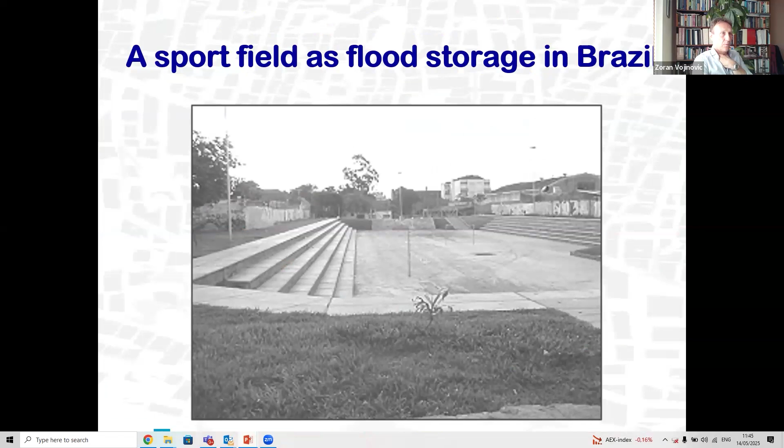The last thing I want to mention is that for the models, when you collect the data, besides the geometry of the system, we also need to pay careful attention to the condition assessment. For the pipes, you may need to run CCTV surveys to get an idea of the structural integrity of your pipe, how it looks inside, and what roughness coefficients you need to put in.

Because it is not always all ideal as we may assume, we also need to be aware of illegal connections. This is a picture I've taken from Sydney, Australia. You may think everything is well regulated in Australia, but no - you can find some illegal connections.

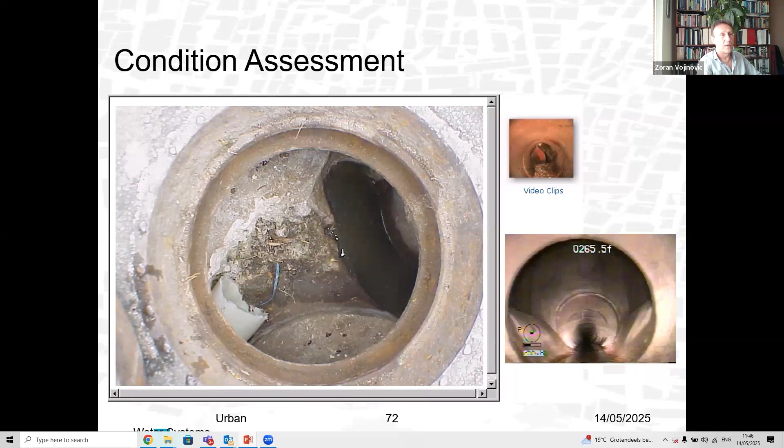People stick their house pipes into the nearby manhole, which may be separated, and then they put the stormwater connection in, and that's a problem. So I would like to finish it off here. I don't think we'll go into questions now - we'll go into questions at the end of the day.

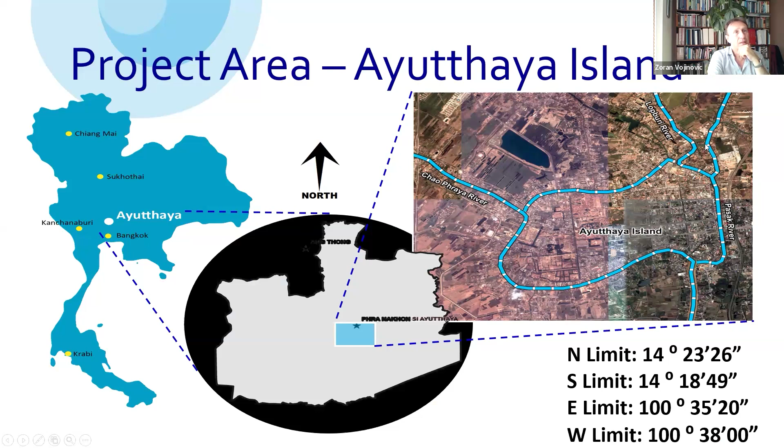So this is where Ayutthaya is. If you see, this is a map of Thailand. Bangkok is south, and Ayutthaya is about 2 hours to the north to drive. It's surrounded with different rivers: Chao Phraya, Pasak, and Lopburi River on the east.

In that particular year, 2011, there were 5 storms that consecutively happened, and they brought a lot of floods to the local population. I mentioned in my previous lecture that the water remained on the ground for 2 to 3 months, and in some parts it exceeded 2 meters.

So this is Ayutthaya. Again, a lot of monuments there, but the areas are kind of scattered. There are also some residential pockets. I will skip this stakeholder analysis part, because it was very important for us.

This is in terms of the hazard assessment. The area which was studied falls within the catchment of Chao Phraya River. Chao Phraya River is a very, very large river, which we first modeled using the one-dimensional model—in this case, Mike 11.

This is what you see on the left side. So first we have a full model of Chao Phraya River. Then we have taken one part, the right side shaded area, as a second model. We took the boundary conditions from the first model and used them to simulate the second model.

What you see as a shaded area on the second model represents the area where we coupled the 1D and 2D model. Why didn't we couple the 2D model with the 1D model at the first step? Impossible, because then we would need an enormous land surface area, and computation would be impossible.

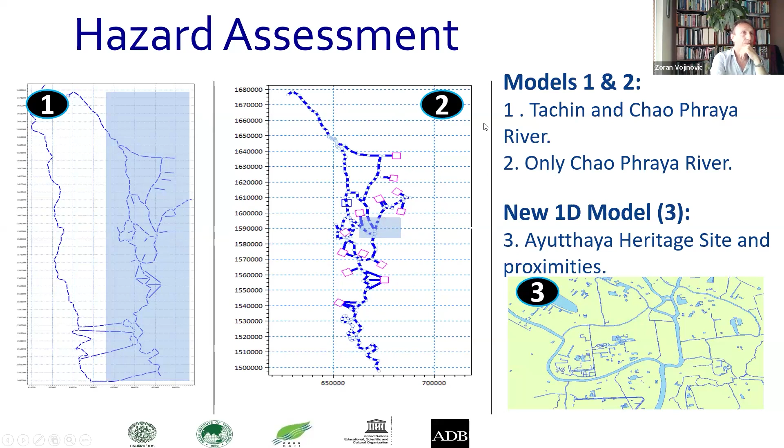We would consecutively run model 1, provide the boundary conditions to model 2, and then after running model 2, provide the boundary conditions to model 3. And these are some of the results.

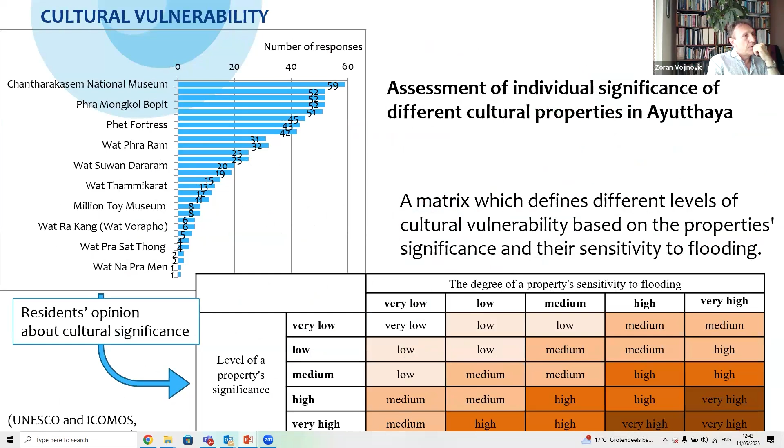And we tried to map it. Then basically the final result is the combination between the social, cultural, physical, and economic vulnerability to get the overall combined vulnerability.

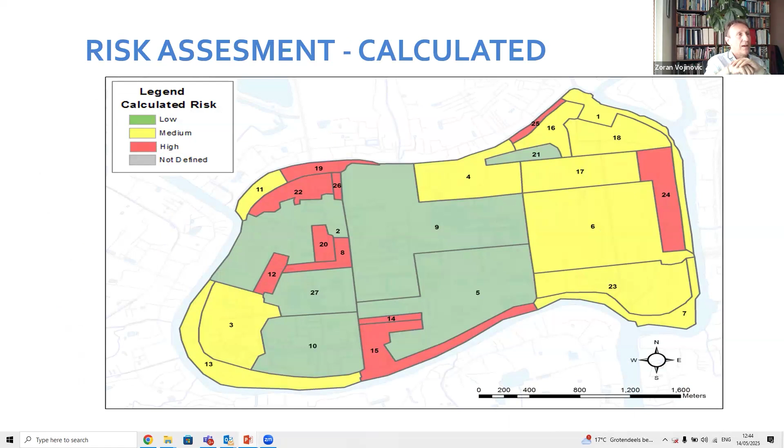However, the idea is to then combine this with a hazard map. After mapping the vulnerability in this way, or the risk in this way, computing using numerical models - 3 different models that we use to produce the hazards - combined with this vulnerability, we produce this kind of risk map.

Then we went to interview the local residents to see if they actually feel the same way as our study has shown. To our surprise, we found that in some areas we did not overlap - we had quite some differences in terms of what we came up with, and this is what we call the risk perception. Interviewing so many community groups and different residents, we found that the risk calculated versus perceived was significantly different.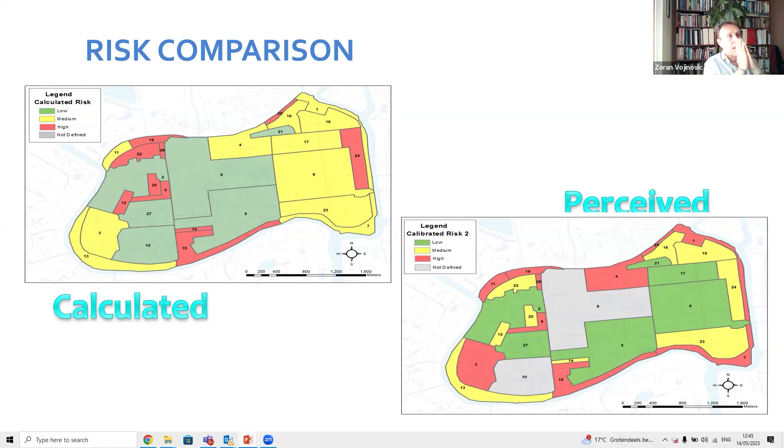What we decided to do was take the so-called perceived risk as a target, and with our calculated risk we adjusted the vulnerabilities - the different weights of vulnerabilities for different dimensions - so that we could reflect the perceived risk. Then we used that model for the assessment of measures, using all kinds of small-scale and large-scale nature-based solutions. That approach worked quite well.

So with this, I would like to finish off. The idea of this lecture was to show you how models can be used effectively in combination with other types of assessments to assess flood risk and propose some rehabilitation or flood protection measures. So I'd like to finish off here and pass the floor to Natasa.

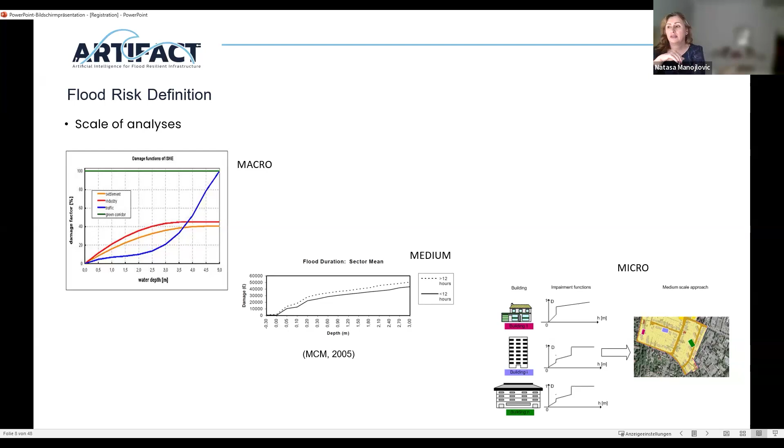When we do flood risk assessment, there are different scales of analysis, from the macro scale, at the level of a province or a larger district area. We scale it down to a medium scale, which can be an urban district, for example, or we can have even more detailed assessments, the micro scale, where we do typology of the buildings, like what we had in the case of Ayutthaya, and derive damage assessment concepts specifically for those types of buildings or objects that we have there.

There are some examples of those generic functions that are being used in Germany, for example, from the area of the River Rhine, or suggested for the River Elbe. And they are widely in use and being cross-referenced across Germany.

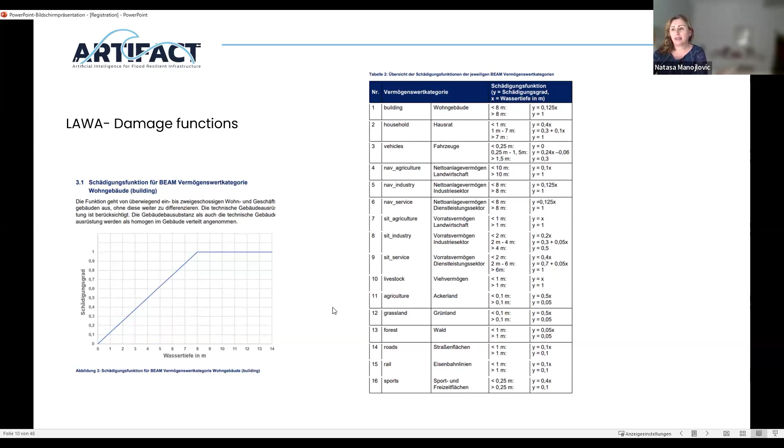In the LAWA document, we also have suggestions or recommendations on what kind of functions we should use for different data, referring to the BEAM dataset. There is a list of those functions, and it's strongly recommended and encouraged by the governing body of the LAWA group to apply them to all assessments of all countries.

So there is a family of different damage curves which we already know. They actually relate the damage rate, so they are relative damage functions, to the water depth, and that's how they are being used and expressed.

But in order to do a risk assessment, practically what we are doing, if we use the model data, we combine the data related to hydrology and hydrodynamic modeling with all the asset values. They are combined and mapped using different damage functions, and we get a specific net damage per spatial unit, depending on what kind of spatial unit we have—usually the water raster, like water depths, taken from the hydrodynamic models, then combined and intersected with the land use.

Then we have this mapping function, the damage function, or set of damage functions, which map the value of a raster cell to a specific damage. That's done for different annualities of the recurrence intervals for the flood events, and we end up with a set of those functions.

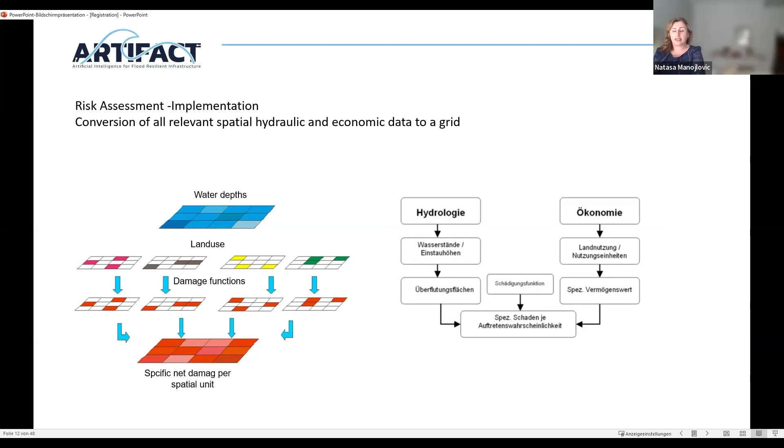In order to use this value for the cost benefit analysis and further processing, we average it and get a value called the expected annual damage, which is then further processed and analyzed for the risk classes.

In the end, risk classes are defined and given for different types of areas, here in Germany very often, especially in an area like Schleswig-Holstein, a northern province of Germany. There are different classes defined for urban and non-urban areas, just to emphasize this difference and not use the same criteria or threshold value for the analysis.

The LAWA document's idea is also to use kind of rules for the threshold. One rule, very often used, is: if the damage of the wetted, flooded area is less than 5% of the total net asset value of the region or administrative unit being regarded, then it's considered not significant damage or not significant risk. Otherwise, it falls under the banner of significant risk.

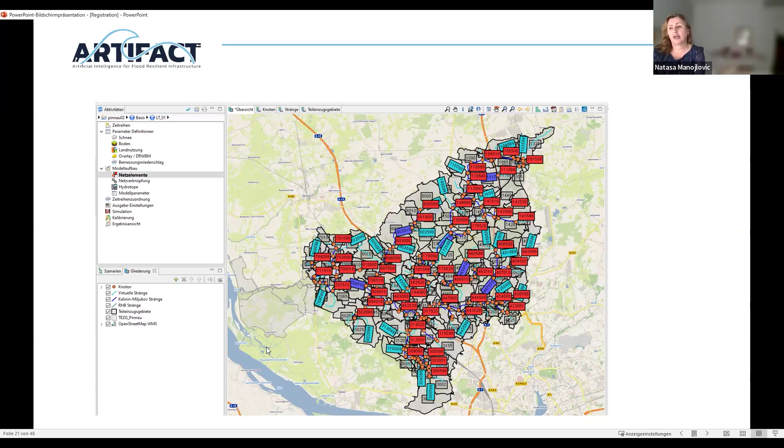In the end, the model has been run, and with the long and short-term calibration, the model is then calibrated. As an outcome, we get the discharges of different annualities, which are then going into the river itself. So it's an input for the hydrodynamic model, which is then being used and developed.

The Telemac actually calculates the water depth and the two velocity components at each point of the calculation grid, which is given here. Finally, the outcome of the hydrodynamic model is a water level raster for different annualities and recurrence intervals for the flood, referring to the flood events.

All that comes together into the Kalypso risk module, which is a standalone, separate module supporting different types of data or background data, which is new. What's new here is that the BEAM dataset is enabled, so it's possible to use and test it and check whether all the functionalities and elements given there really support the required level of detail for further analysis for the risk assessment.

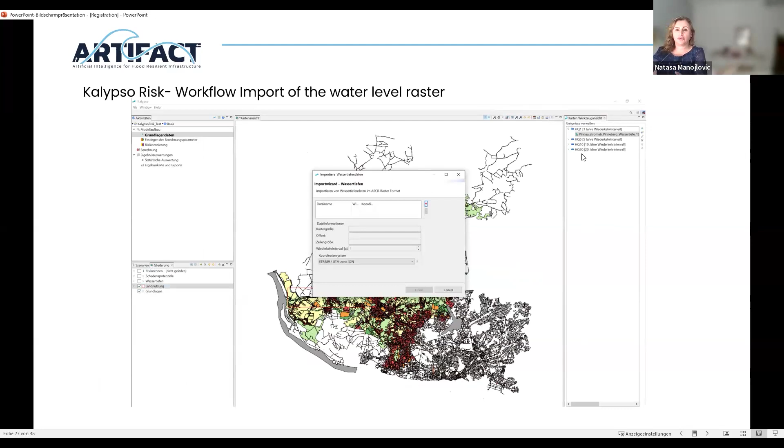This is usually what we get as an output. This data can also be visualized, and we'll see the extent and where is actually the area covered by different flood events, different recurrence intervals.

What we also can do in Kalypso, going very easy and straightforward, is that this mapping function, which in this case is the damage function, the set of damage functions, can also be imported here. The default values are the ones given by LAWA, because we are now working with a BEAM dataset.

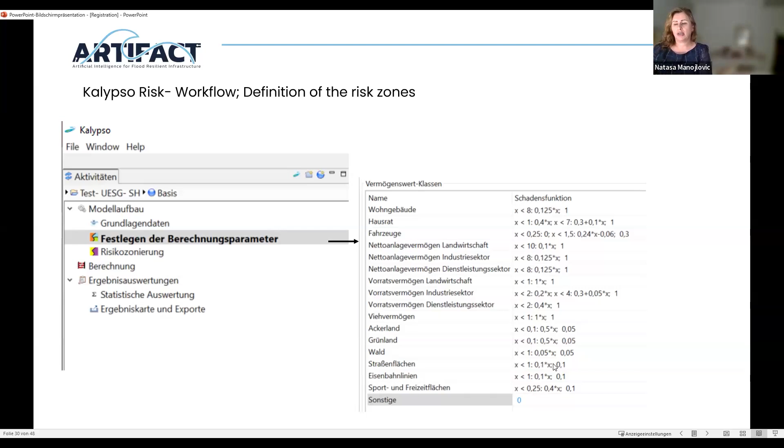In case some other are needed, they can also be added and changed, depending on the need. Finally, after calculating the damage, basically for the given water levels and for the information we have in the background, in terms of the net asset values, the flood...

First the damage potential is calculated, which then later leads to the development and assessment of the risk zones. Different damage potentials were given for the different flood events, from the 1-year up to the 200-year flood event.

Then that's also computed and given as an output as the expected annual damage. Here again, you can also visualize different of those events with and without the background map, and get this information. What about the point? These are the functionalities which you also have in ArcGIS or QGIS, similar to that.

And in the end, you get the flood risk zones. Here, basically, it was just the first assessment. For the annuality of a 1-year flood event, basically everything was green with some red areas, but it gets worse once you increase the level of extremeness of the flood events.

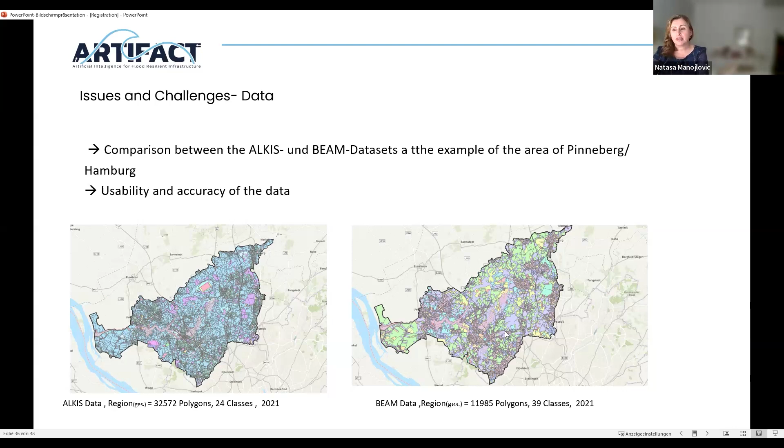But what is interesting here, and that's why we are talking about it, is having the BEAM dataset as a requirement, at least as something which has to be checked. The first thing you have to do is check its usability - can we really use it, and what about the accuracy of the data in general? This means comparing it with the real situation, but also comparing it with previous datasets used for the second cycle of the reassessment of flood risk, to see what is to be expected, whether we can use this data, and whether it's possible to adjust it. What about the accuracy and usefulness of this data?

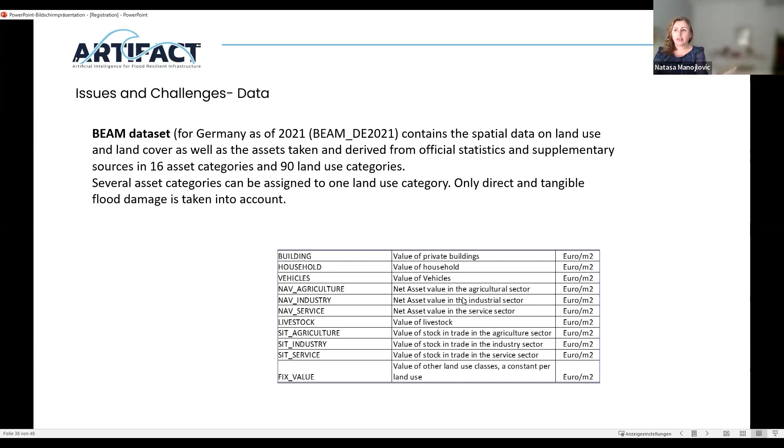BEAM is something available on the Copernicus side, using Corine land cover, but in Germany it's also using the Urban Atlas, giving a much higher level of detail than Corine. It contains spatial data on land use and land cover, and what's very interesting is that it also gives the net value, the asset value per category in euros per square meter. That's something you don't get in different datasets. So the idea was to have a common repository of data in a common database that could be compared and used across Germany.

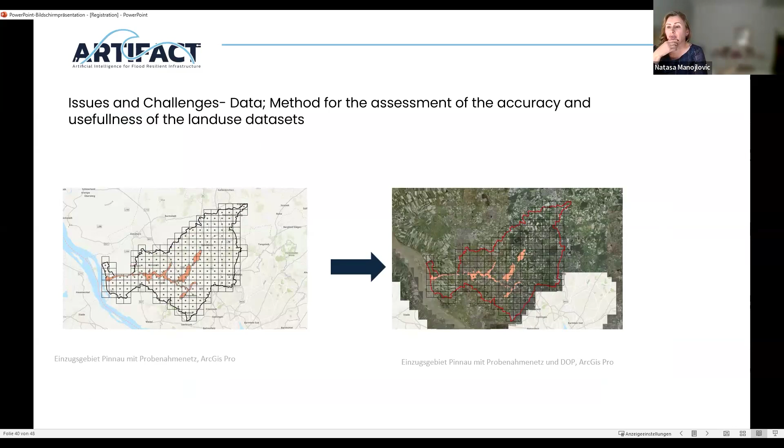But this is what happens if you compare Corine, ALKIS, and BEAM - there are differences. The idea was to use this because for the modeling, especially in urban areas, it's important to know what kind of data accuracy level you have and what you're dealing with, to compare those datasets and see whether this really works, and how it impacts first the flood modeling - the distribution and propagation of floods - and secondly the risk itself. So a method was applied using a generated network or raster, which was then checked within those raster cells for what kind of changes, what kind of land use we have in all three datasets, compared to the ground truth.

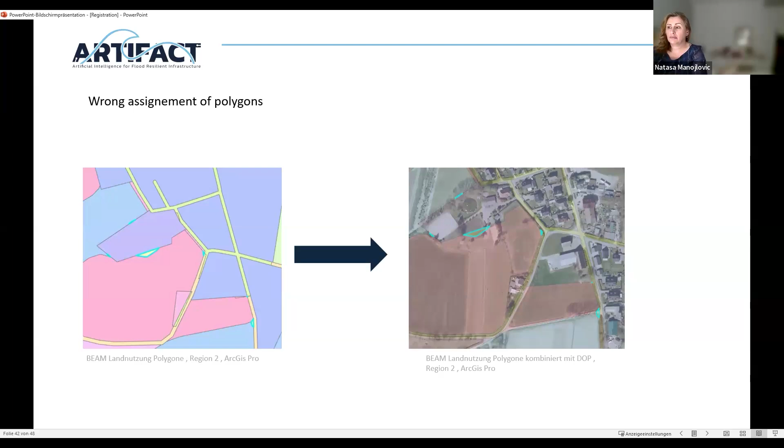That was our validation dataset, the real data on the ground. And I realized there are some issues with the BEAM dataset - there was a wrong assignment of the polygons. In this case they were small ones, but in urban areas it can also be a problem, especially when it comes to assignment of damage functions, which differ for different types of areas. Still, that was something that had to be addressed and corrected, or should be corrected.

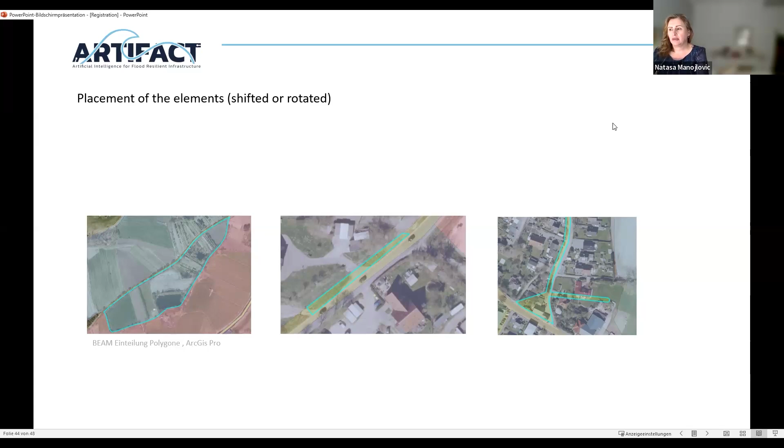So there was an issue that had to be resolved when we got the results from the hydraulic and hydrodynamic modeling. There are data issues, as Zoran addressed, in scarce data areas where you have to find a way to get data. And here you have data, but sometimes the quality is challenging, creating problems when doing modeling. For example, in hydrodynamic modeling you have different DTMs which should have the same coverage, but they are scattered, or look different, or have cells without values. So there are all kinds of things still happening, creating additional challenges.

But also the building issue, which was mentioned by Zoran as well. If you're modeling buildings as pervious and impervious elements, where is the water level and how do you consider buildings? There are different approaches, different ways. Both were implemented in the modeling activities here, depending on the issue.

What's interesting, and what we should keep in mind, is that very often when we discuss such problems, we try to get a very well calibrated model, like water levels at the centimeter level. But when we do risk assessment, we combine such high quality hydrodynamic models with damage curves. The assessments related to damage assessment are a totally different order of magnitude when it comes to uncertainties, because there are so many assumptions taken when we do risk assessment, which often override all the issues given by the hydrodynamic modeling.